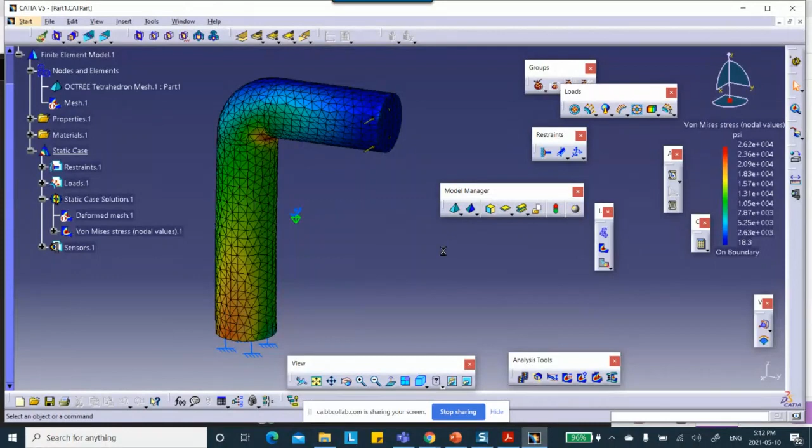Now I'm going to close this, I don't need it. I'm going to go back to the original part, this was the original part, and save it under a different name. So you go to File, Save Management. This is the original, this is what's open, Save As. In that folder, the original one was part 1. It's a bad idea to call this thing part 1. I'm going to call it part 1...

How about with symmetry? How about that? With symmetry. It's very common, people are careless, they overwrite the stuff they have done. And when they go and try to submit it, it's all gone, replaced with the new stuff they've done. In the first place, it's a bad idea to do this within this directory, but if you insist on doing it in this folder, okay, change the name. Don't use part 1, because it's going to overwrite that. Part 1 with symmetry. Okay.

So in that folder, I have two parts: the original part, which was called part 1, and the second part that I just gave that name. It's good practice to change the name up here so you know what you're dealing with. I didn't do that when it gave me the default part name, I just took it. I should have changed it so it wasn't called part one, it should have been called something else.

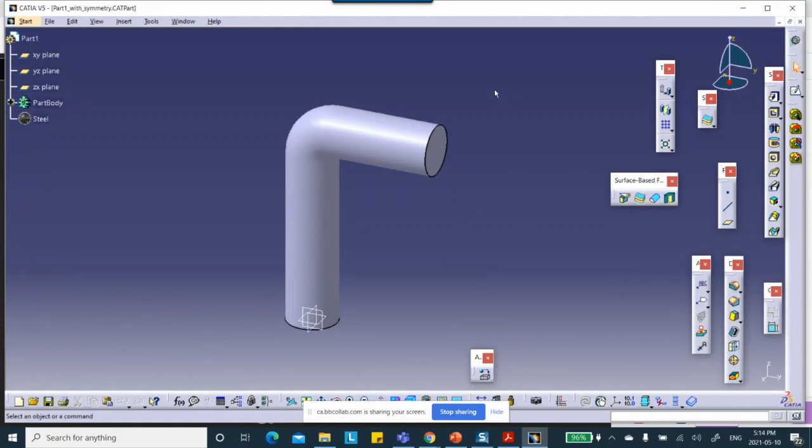If the bottom is fixed, and you apply a load in the direction Y, coming towards you, do you agree the stuff on half of this is the same as the stuff on the other half? If you cut this thing in the middle, do you agree the deformation is going to be the same on both sides? Yes or no?

If the load was applied in the direction I showed you initially, there won't be any symmetry, because this thing bends. But if the load is coming towards you or away from you, perpendicular to that face, then I don't have to model both halves. I only need to do half of it.

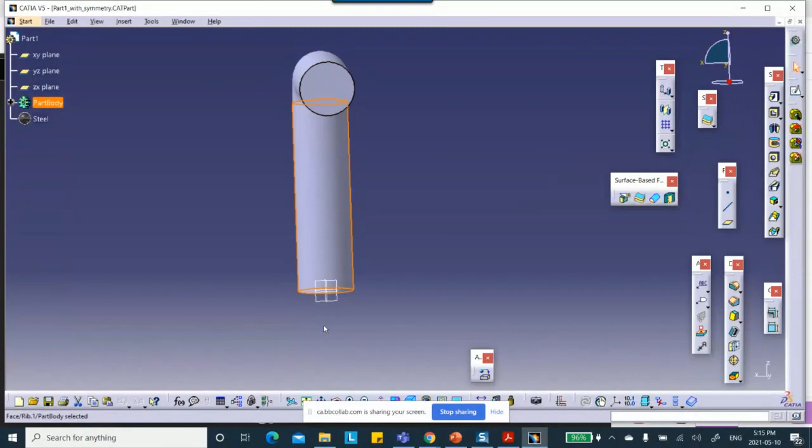So that being the case, I'm going to reduce the model by taking half of this. Let me go to Split, surface-based feature, Split. CATIA calls it split, it doesn't call it cut.

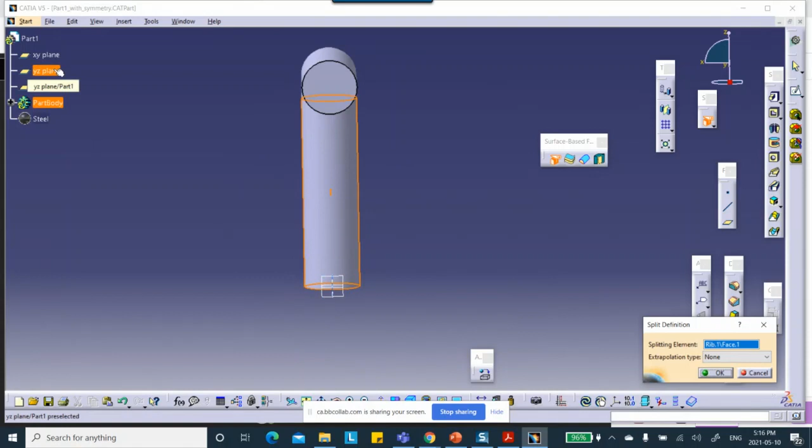I'm going to split it with a plane that puts this thing into two halves. This is very convenient because I already have a plane like that—it's the YZ plane. It asks, do you want to keep the left side or right side? It doesn't matter to me, I'll just keep this.

I'll save it. When I save, of course, it's under the second name because that's how I saved it a minute ago.

Now, symmetry is a big chunk of your mark on the midterm because it makes you think. So don't be surprised if a problem has, hypothetically, 10 points—3 of them, something in that range, would be identifying symmetry. Don't be surprised. Now, as far as making the model, it's done.

Now, for the person who asked me what steps I did, just follow me. Remember, material is already applied there because it came from the other part that I saved under a different name. So you go to Start, then Analysis and Simulation—Generative Structural Analysis, since you haven't customized it.

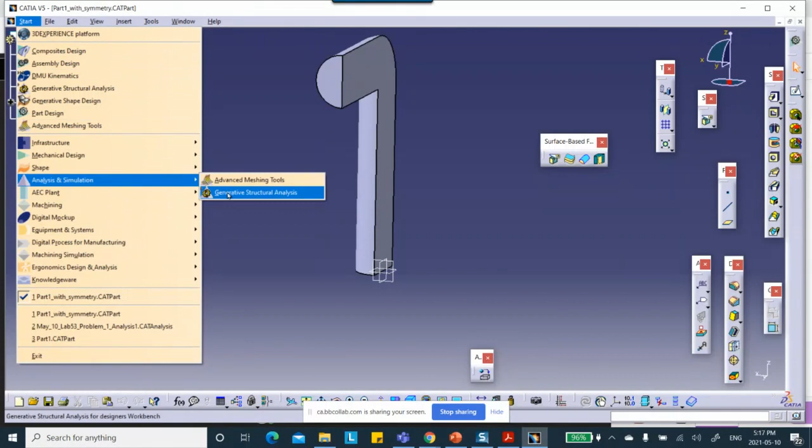Generative Structural Analysis—CATIA sees a solid object and immediately meshes it. There, it meshed half of this. Static problem.

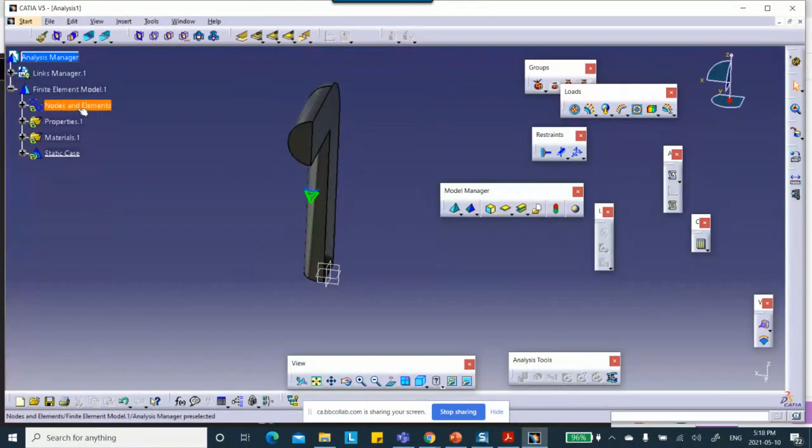If you want to see your mesh, put the cursor on this line, right click, mesh visualization. There we are.

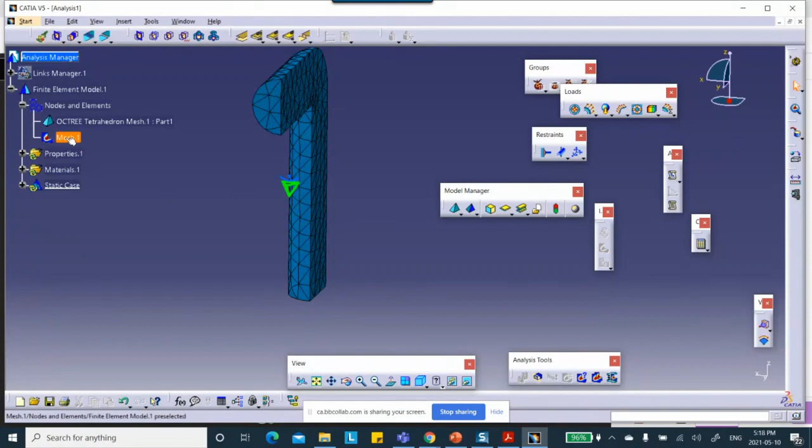To do the rest of the problem, you have to either delete the mesh or deactivate it. It will not allow you to put forces, moments, and restraints on this—this mesh is totally useless. Right click, deactivate. And if you don't like this rendering, change it to some other kind of shading, right there.

You know how to refine the mesh if you're asked to do it in a specific area—I'm not going to do that, I already showed you how. You go to the model manager, the traffic light, second toolbar, local mesh size, pick the thing and do it. I'll keep it like this for now—you're going to do that on the first assignment anyway, and on the test.

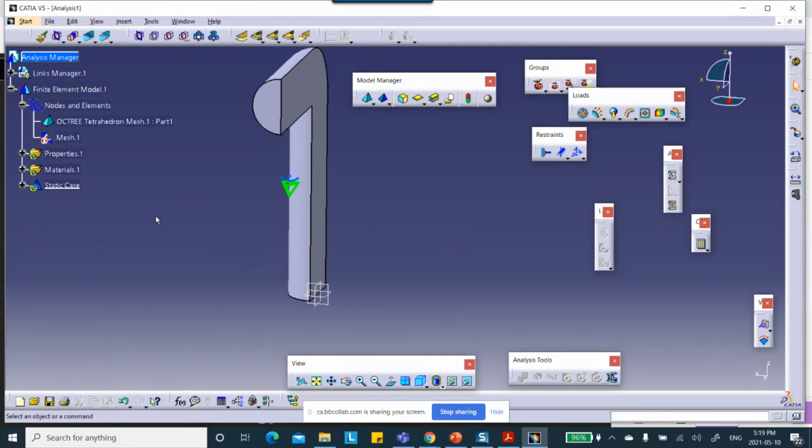Okay, now the bottom is clamped. The bottom is clamped, so there's the clamp. There we are, clamp. There's the clamp.

And I have to apply a force here, coming towards you, at 2,000 pounds.

Can somebody help me? This was the force, right? Distributed force. In the direction—in my case, y, correct? Is that right? Look at your screen. It's coming towards you, direction y. So not x, y, 2,000 pounds.

And the support is right there. This is the support, right? It's asking for the support—where are you applying this force? Well, it's on that face. Say okay.

You know what? If that problem had 10 marks, you'll probably lose 2 marks for this. Can you tell me why?

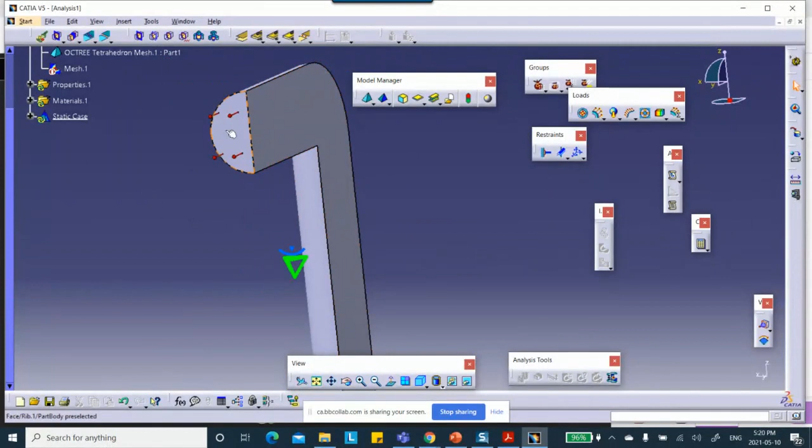Well, if you're pushing it into the screen, yes, you're right. But if you're pushing it away towards you, you're pushing it like this. So in one case you're pushing it this way, in the other case that way. Let's say that this was actually the way I wanted to do that—you'd still lose your 2 marks. What's the issue?

Yes, because that 2,000 pounds is on that entire face, you're taking half of that face. So you divide it by 2. That's very easy to fix.

You go to the screen, or you go to the tree, double click on it, and make this thing 1,000.

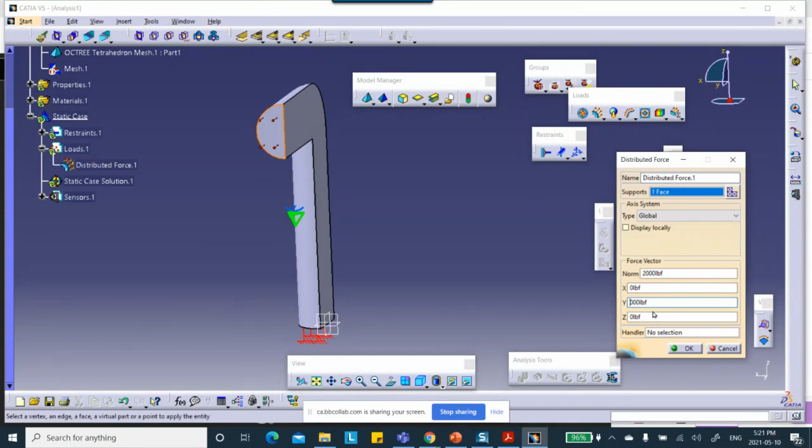Okay, good. Now let me ask you a question. Suppose I said 200 psi, I'm applying 200 psi on that face. What value would I use for the pressure?

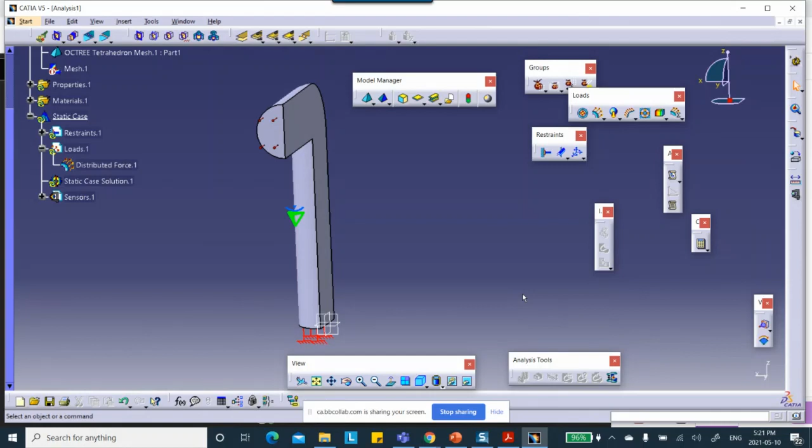Yes, pressure is pressure. Doesn't matter how you look at it, if pressure is on that surface per unit area. So if this was psi, don't divide it by 2. If it's the force, you have to divide it by 2.

Excellent. So before I run it, let me go save this. Save the analysis, because as soon as we jumped in there, we created an analysis file. So you go to File, Save Management. This is the analysis. Save as.

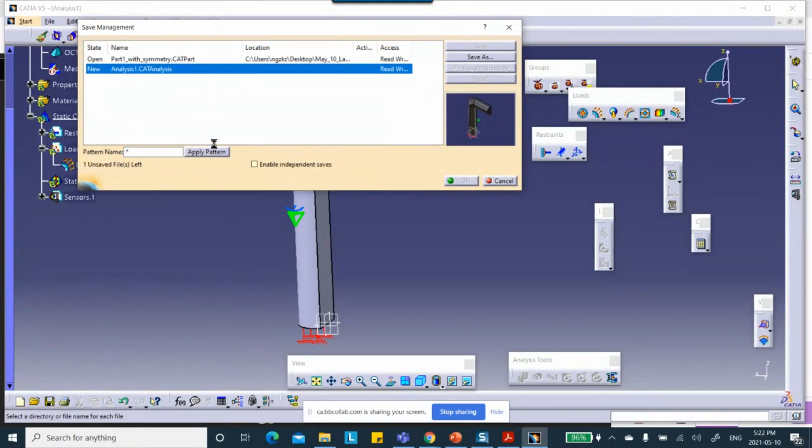I don't want to call it this. I want to call it problem 1 with symmetry. With symmetry. So that it doesn't mess up the one that's already up there. I don't want to destroy this. This was the original problem.

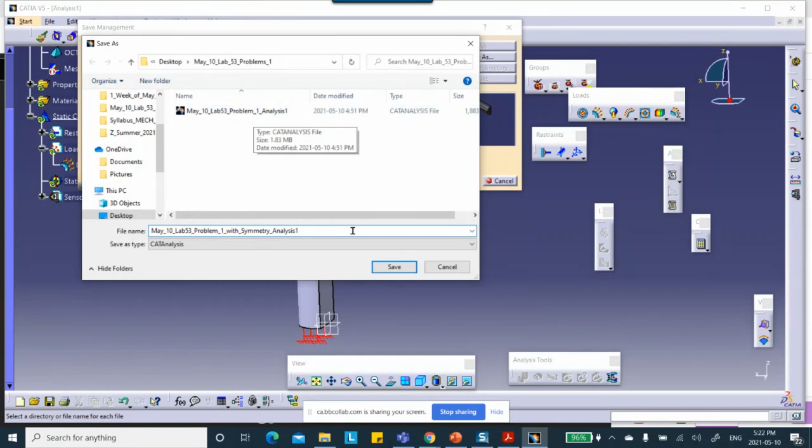Okay. Should I run it? Yes? Can you help me? Is there something else that I have to do? Well, I mean, you can run it. There's no problem. Just run it and see what happens.

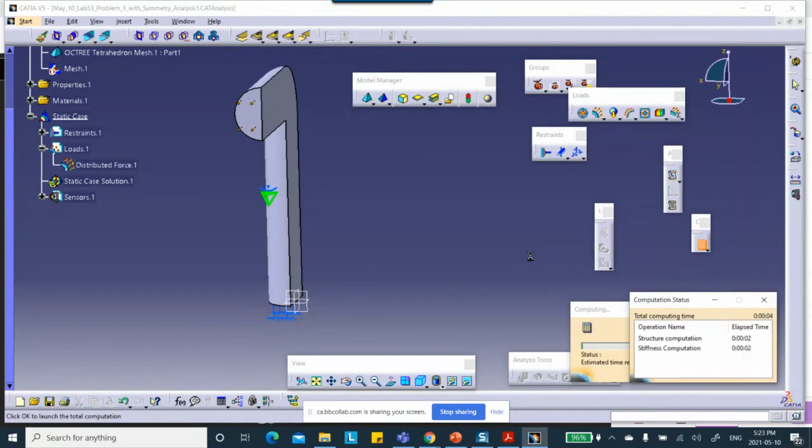And you can look at the deformation. Deformation is this, no numbers. This is deformation, you click on it, it shows deformation. And let's look at it from a view, front view.

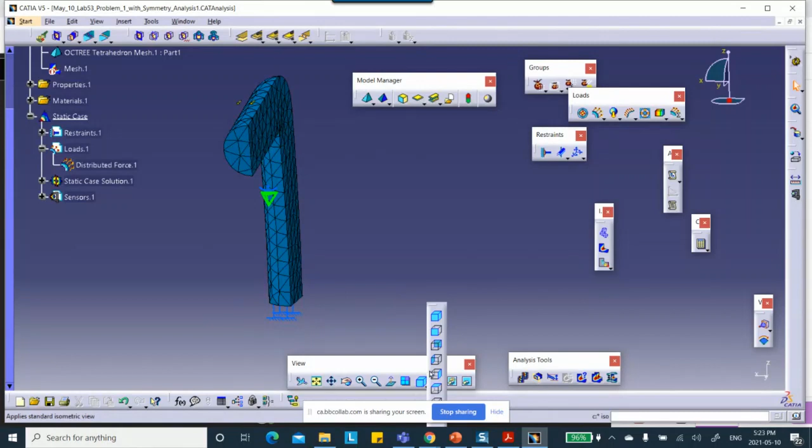Okay, so front view is, I guess, this one. This is side view. Whoops. I guess side view right there. Okay, and I can animate it. Okay, that looks good, that looks good.

Now I want somebody to criticize me, because you don't want to lose your 2 marks on the final exam. Oh not final, midterm, midterm exam. What is wrong with this picture? It looks good, I can plot the stresses, everything looks reasonable, etc. But there's a serious problem.

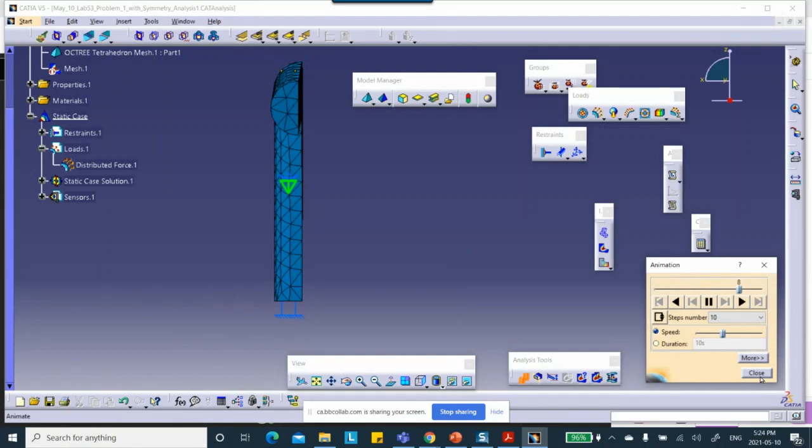What do you say, guys? Gals? Oh no, I did put the force. I put 1,000, right? I did put 1,000 pounds. I did put it, that's why it's actually coming towards you. There is a force there. Here, let me turn it around. You can see that there is a force, right there, right there. You can see that. What else?

Okay. No, we can do that. There's no problem. Here's just, you want to plot the von Mises stress? I'll plot it for you right there. Well, you get stuff, you get stuff. So let me change this thing to material shading.

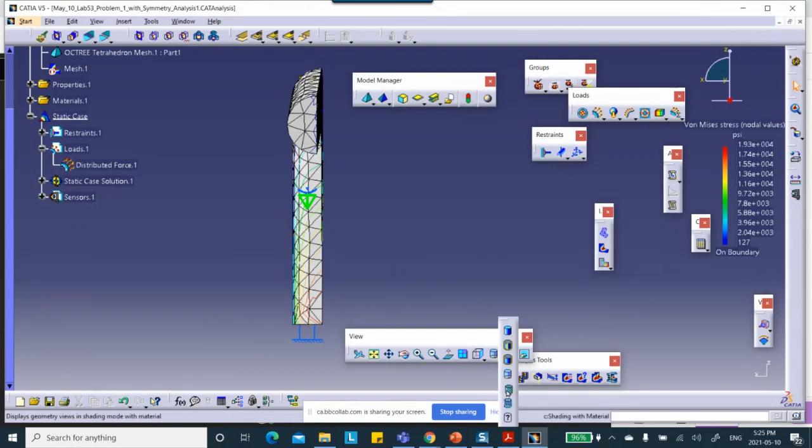Sure, there is. Where's material shading? I'm going to move this thing up there so that material shading. There's a stress, there's a stress. I mean, you can rotate it, put it in this view.

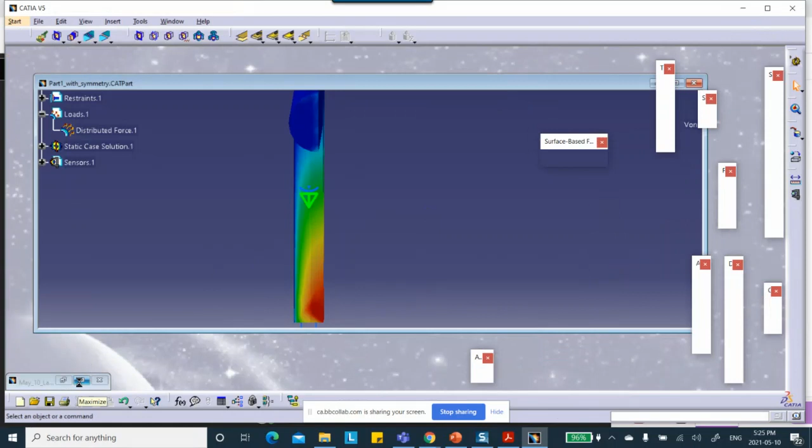Let me ask you this. Whoever told me initially that there is a plane of symmetry here, I said use your common sense. Look at this thing from the front. Let me bring this thing, the same view, but the part. Let me put it in that view. It was the side view, right? Side view. Okay, you looked at that and you told me that the stuff on the left and the stuff on the right are the same, right? They behave the same way. And I agree with you, correct.

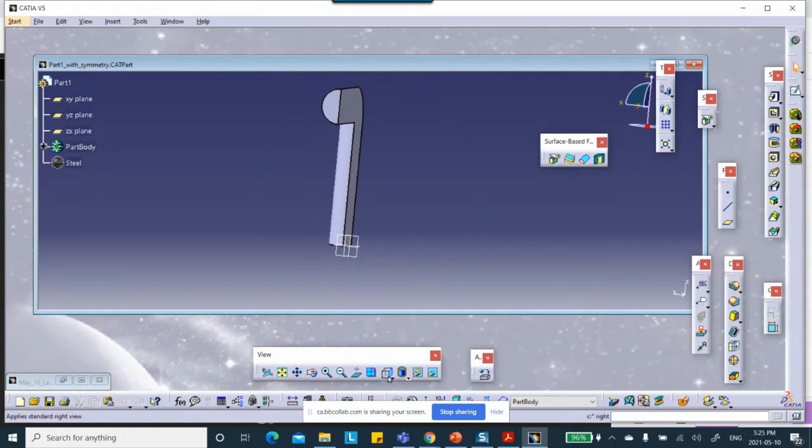So if you are a point on that face, on that surface that I introduced here by cut, see that? I introduced this surface artificially. If I look at a point on that surface, can it go to the left or to the right? Need help? Help me. If I look at a point on that face, can it go in the direction X, either to the left or to the right? It shouldn't. And that's what we call a roller, right? We call it a roller. The points on that face must be, plane of symmetry must be on a roller.

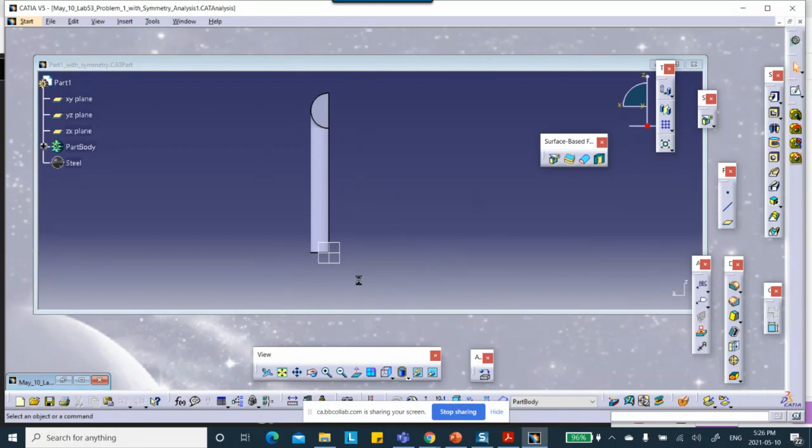When you look at the analysis that I did for you here, if you looked at the deformation, look, it moved. It moved to the left. This top piece moved to the left. Even here they have moved to the left. I can't see it very well because it has moved very little.

So just cutting the piece into two, which is good, it gives you some marks. Just cutting the force into two, that's good, that gives you your mark. Is not good enough to get the full mark, because you have to put that face that you introduced on a roller so that it doesn't move to the left or to the right. That's what the plane of symmetry means.

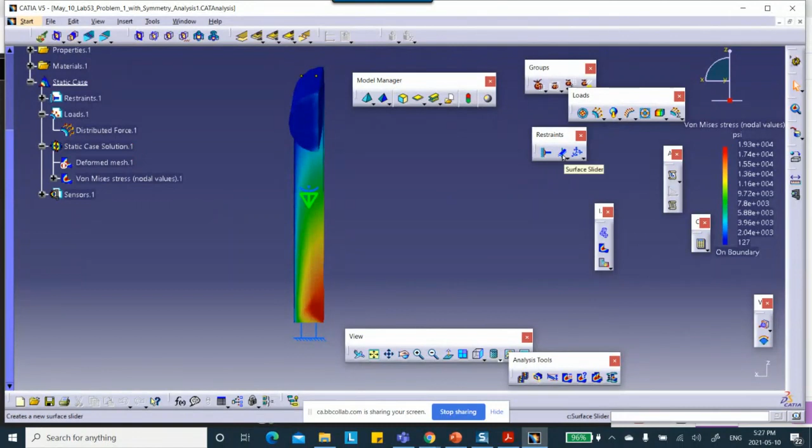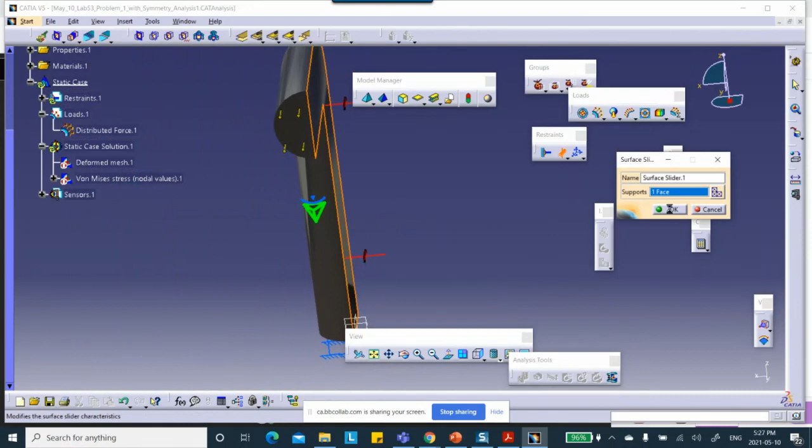So CATIA does not have something called roller, it has something called surface slider. When you look at it, though, it looks like a roller. Okay, so let me deactivate this. When these things are on the screen, you can't apply anything. So you turn this thing a little bit. Surface slider, see that? Surface slider on that face. See that? If you look at it from close, it looks like a roller icon. See that? Looks like roller. Okay, and say okay, and save it.

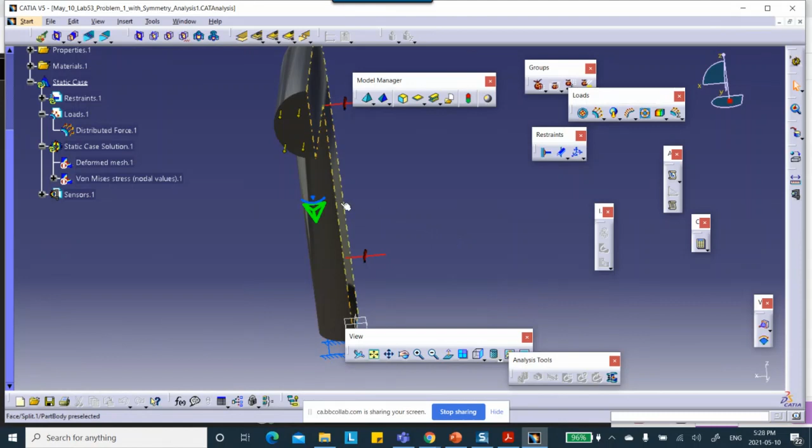The reason it's a good idea to save before running is because if the system crashes, or you set such a fine mesh that it takes forever to run, you won't finish your test on time. Then at least you can kill the job, kill CATIA, and go back to your last saved result. Okay, now let's run it.

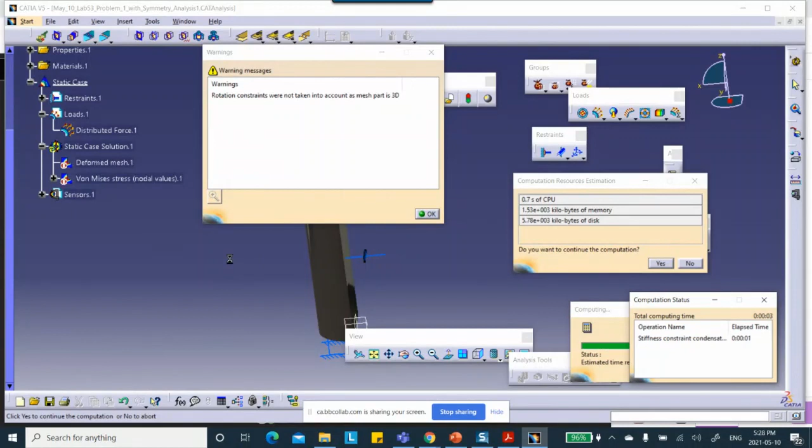While this is running, I have to repeat this lecture three more times. Don't worry about this warning message, you'll get used to it. It's a good idea to read these things and sometimes question them, but not right now—this is the first lecture, basically.

Good, so now let's look at your von Mises stress. View from the side—look, there's no going to the left or to the right. You can animate it, by the way. There's no going to the left or to the right. That gives you full marks.

Otherwise you lose too much because of the surface slider, because it's very common—people see it, they cut it into two pieces, they see the force must be half of that. That's good, but they forget about this, and you can see that it's wrong, basically.

Okay, all right guys, any questions about this?

Okay, now, before I kill this, let me save it so that the last thing I have done is saved.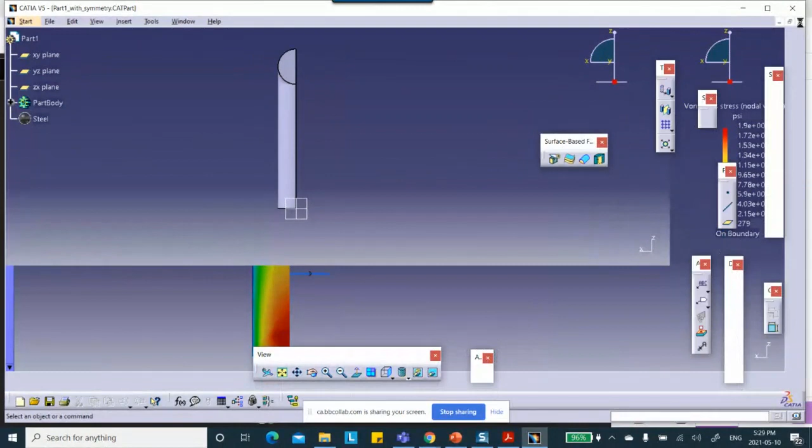Now when it comes to uploading your work, either for the homework or for the test, what two files do you have to send us? You have to send us the part file and the analysis file. I'm going to kill this one too.

Okay, let me see, where is my desktop? This schedule is so screwed up that I have to make this so I won't forget. Here's your lecture—where is this guy? Where is that folder that I made? Right, May 10th—remember, I made two parts, one with symmetry, one without symmetry, and two analyses, one with symmetry and the other without. These are the analysis files, these are the part files.

So you select example part with symmetry and analysis with symmetry, and submit it. Okay, any questions? Sorry, sir.

Just to clarify, we don't need the cat analysis results and analysis computations files? Okay, yeah, I will do that. But the other fellow was asking—can you say that again? The first fellow was asking me, you don't need what? So I think you have two different classes open right now because we can't hear the other class, but do we need the analysis results and analysis computations files?

Okay, hang in there, one second. I want to make sure I understand what you're saying—you have two different classes? What two different classes? Yeah, the people who were in the section from before, we can't hear them talk. They never changed classrooms.

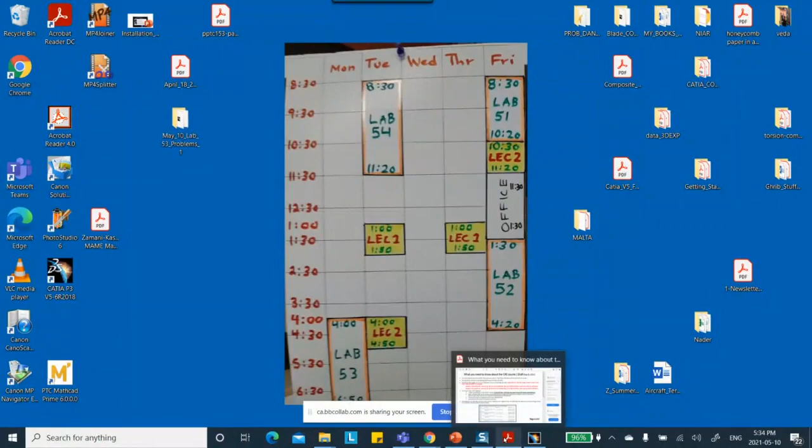Okay, so we have an I-beam like that, and one end of it is clamped, and we let it sag under its own weight. So we want to see what are the stresses, what are the deflections, etc.

First of all, notice that I'm saying I-beam 10 inches long. Imagine you have an I-beam that's 10 inches long, something you use in construction, and you somehow clamp the other edge by welding it to some other piece. How much do you think it's going to deflect? Very little, do you agree? Okay, so this is an academic exercise.

I want to show you how you bring the weight of the object in as the force. There is no force here, there's no applied force, you're not applying any force. The weight comes from gravity. I want to show you how you do that.

Now, first I will do it the way it's done in the book. If you go to my website, those links that you have, you'll see it done both ways, with symmetry and without symmetry. First I'm going to do it without symmetry. I don't want to spend time on making these dimensions, so I will make up something that's like an I-beam type thing, 10 inches long, okay?

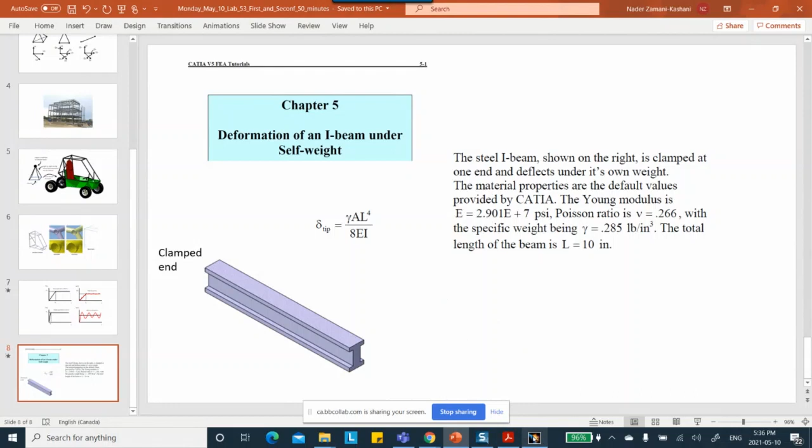Okay, so let me go, CATIA. Start a part file. Remember, I left this name as part 1, so I'll call it part without symmetry. How about that? Part, because it's easier for me to keep track of these things. Part without symmetry—part without Symm, how about that—just like it's done in the book.

Okay, save it right away. File, save management, save as, desktop—where is it—desktop, new folder, May 10, lab 53, underscore problem 2. Okay, so it's going to go in there. Save, okay, save, okay, let's make it.

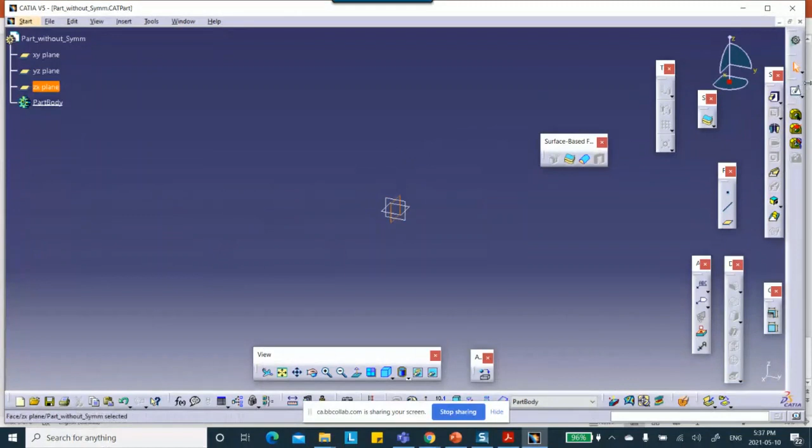On a convenient plane, on that vertical plane, I will sketch something that looks like an I-beam cross section. Be patient with me because I want to use something that is used very frequently. So I'm going to draw something that is ridiculous, doesn't look like what I want, and I'm going to show you how to fix it.

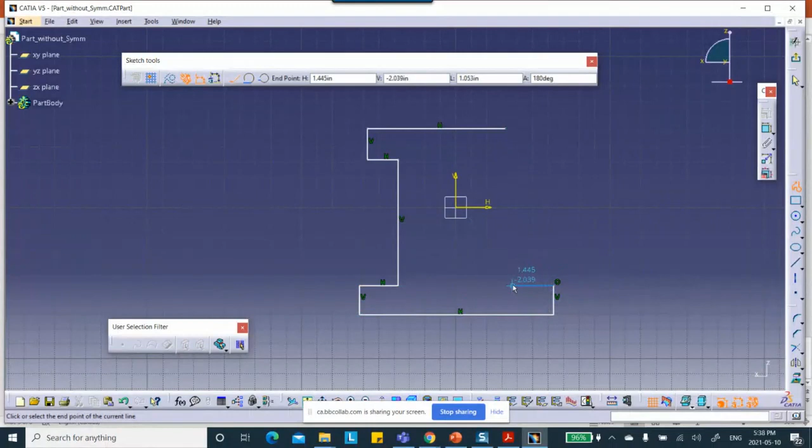Okay, this is my I-beam cross section. Let's do a cleanup here.

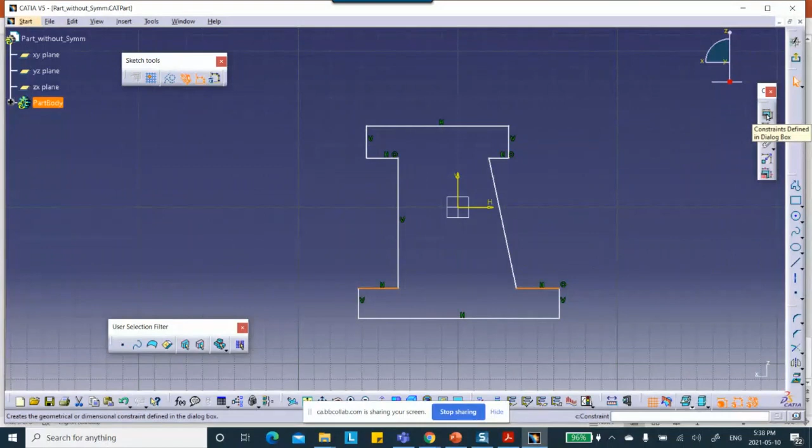First, I want this line and that line to be aligned. Control that line, go to constrain using the dialog box, and say coincident. This line, control that line, I think they are on the same plane.

But let's make it coincident anyway. Okay, good. This line, control that line, we want to make them parallel. Parallel. Okay, very good.

This line and that line and the middle axis, I want to make them symmetric. This line and that line and middle axis to be symmetric. This line and that line and the middle axis to be symmetric. Top line, bottom line, middle axis to be symmetric.

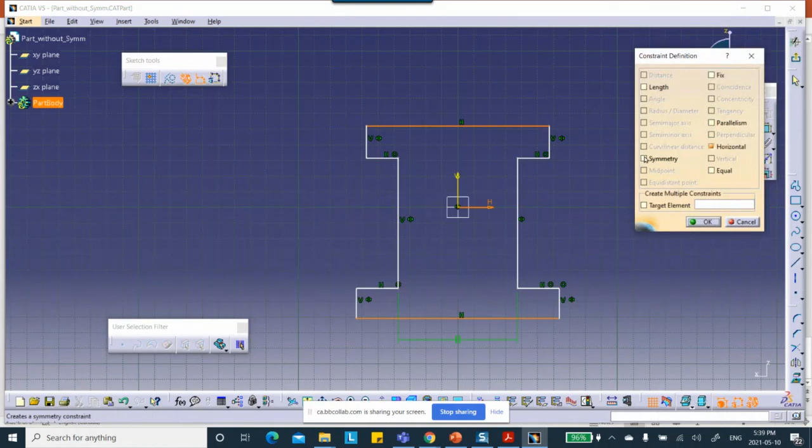Let's do this one. This line, control that line, control middle axis to be symmetric. Oh, God, let me see. Okay, I think these are already symmetric. These are, no, maybe not.

Let's proceed. That line, control this line, to be coincident. And this line and that line to be coincident. Okay, now these are not symmetric, but let's see now.

I don't know why it was bombing out on me. Maybe these dimensions, let's take these dimensions out. Yeah, let's take these dimensions out. I didn't mean to put dimensions there.

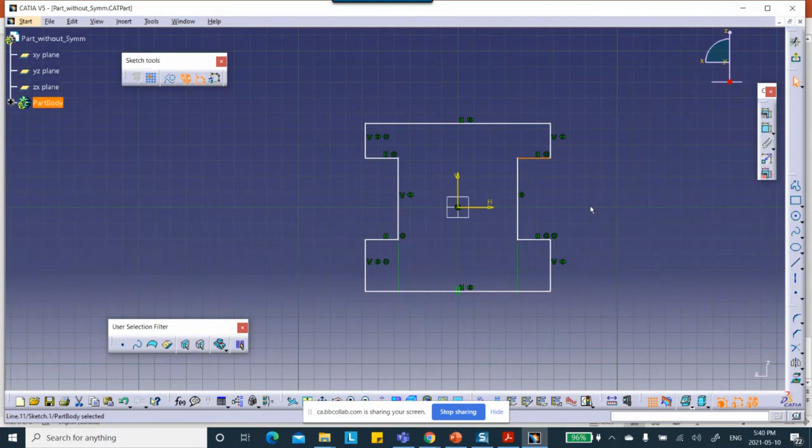This line, control that line, middle axis to be symmetric. This one should work, yeah. And finally, that line, control this line, control middle axis to be symmetric.

Now you drag this thing any way you want, and it's going to stay the way you want it. Look, I don't care how you do it. I want to show you this is a very valuable tool. That's all, that's what I want to show you.

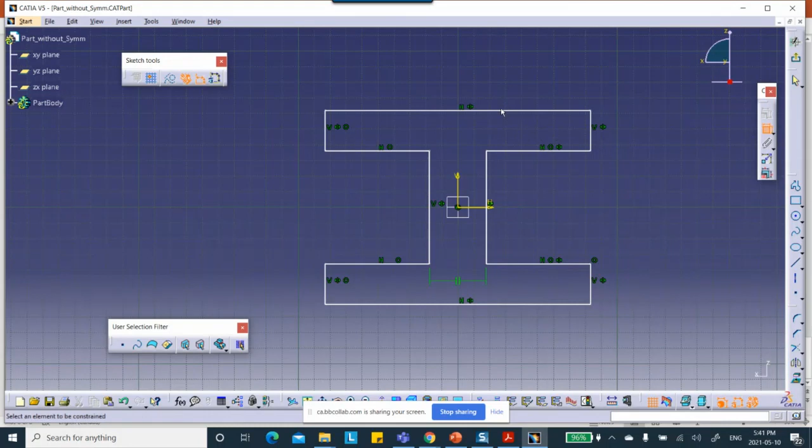Just so you have a rough idea, let's put the dimension on one of these at least to find out how big these things are. So this thing is 6 inches, an I-beam 6 inches. Probably that's okay, yeah, 6 inches, that's okay.

Is there any question? Make this I-beam the way you want it, matching the dimensions you would give it. That's all, okay, exit. The only thing is that 6 inches, isn't that too big? Maybe, because I'm padding this thing by 10 inches, maybe I should change this to, I don't know, maybe 3 inches.

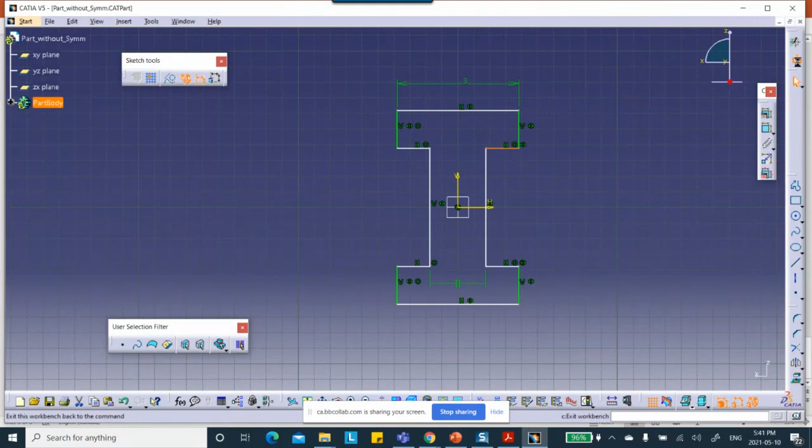Yeah, okay, that's fine. Let me also move. Okay, good, because I'm padding it by 10 inches. So, pad it. 10 inches. Good.

All right, so apply material to it, made out of steel, metal, steel, on that face, on that part. There we are. Save it.

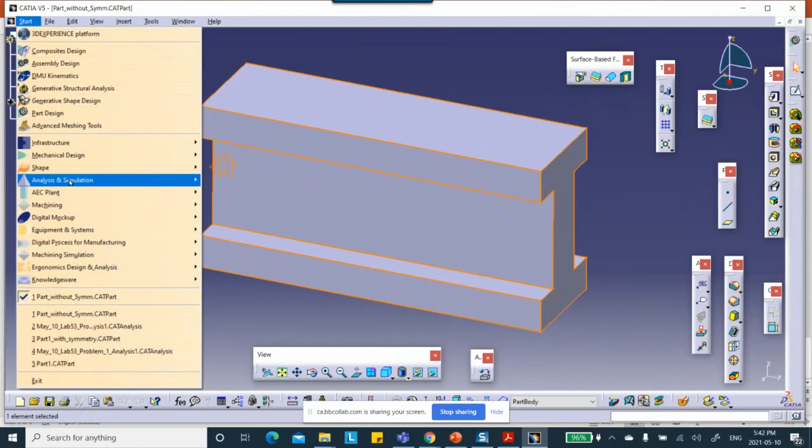Now we're going to go to generative structural analysis. Analysis and simulation, generative structural analysis. CATIA immediately meshes that for you.

So if you change the rendering you can see it better, right there. You want to see your mesh? Put the cursor there, right click, mesh visualization.

Okay, now this is not too bad, but generally speaking, I-beams, the flange is a lot thinner than what you see here. And the web is a lot thinner than what you see. You don't see I-beams like this, okay? Or at least used in structures.

Now look, if this was thin as opposed to what it is now, you would have only one element through the thickness. The moral of the story is that because of the dimensions here, think about it as a pop can. A pop can has a thickness, but the thickness is a lot smaller than the other side's dimensions of the part.

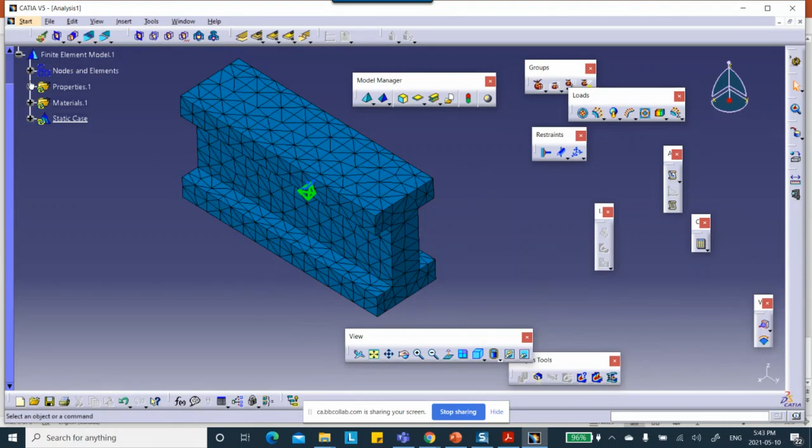So you do not model those things with solid elements. But this is the only thing we know how to do right now. So right click, activate, deactivate.

Shall I save it? File, save management. This is the analysis, save as. In that folder, let's give it a name.

May 10, Lab 53, no symmetry. How about that? No symmetry, so that I can identify what these things are. You say okay.

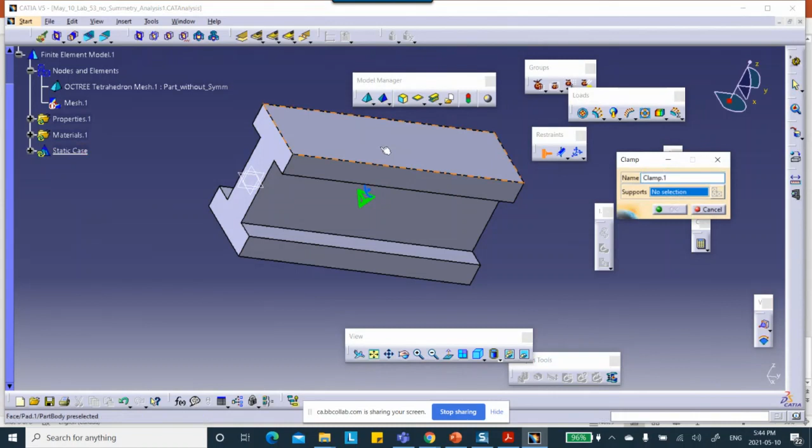All right, the end is clamped. This end is clamped, clamp that end. So what it does, it puts it on the entire thing, but for demonstration purposes it probably puts it on the centroid. Now I want to apply my load, right? Load.

Okay, what do you suggest? How much force should I put up there, and where should I put it? Am I applying a force here, for example, of some magnitude, or what do you say? What is the force that's acting on this part? Or how would you calculate it?

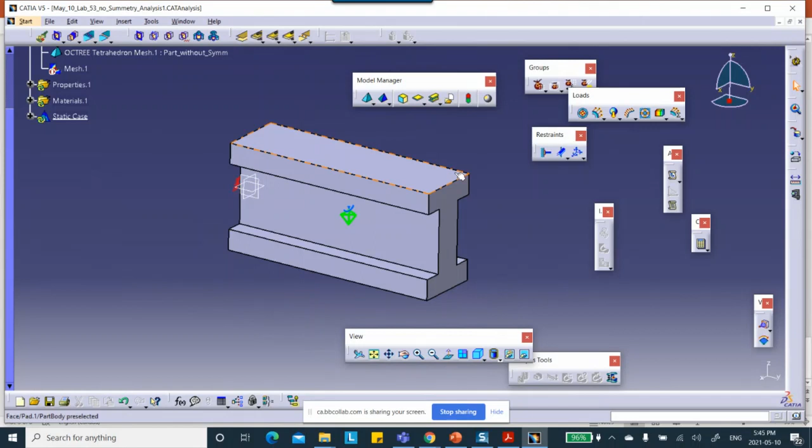Yes, you're absolutely right. I have no clue where the geometric center is, and it can be found, but there's a way to just say, okay, give this object an acceleration. See that under the load? There's a globe here with a downward arrow that reminds you of Apple Newton. You click on it and it asks what you want to specify gravity acting on.

It doesn't matter what you pick, it picks the whole thing. That's why you don't have to go find the weight. It'll do it for you.

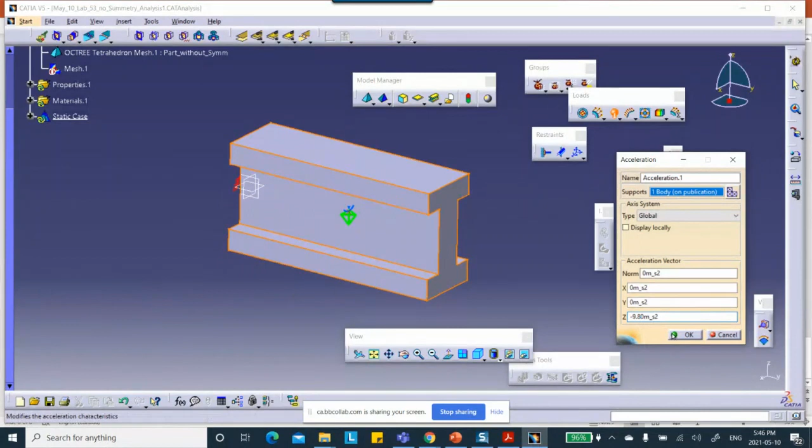It asks, in what direction is gravity acting? It's acting in the negative Z direction. If you don't know what it is, you know it well: minus 9.81. Is that good enough? Remember from physics, 9.8? Yeah, there we are.

It does it for you. You don't have to find the geometric center, you don't have to find the weight. In fact, if you did it manually like that, you'd get different results. This is different.

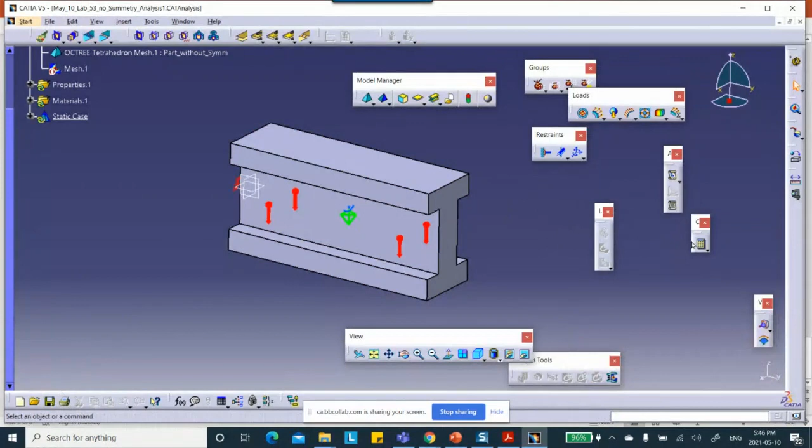Okay, so save everything and run it. Compute. Horrible mesh.

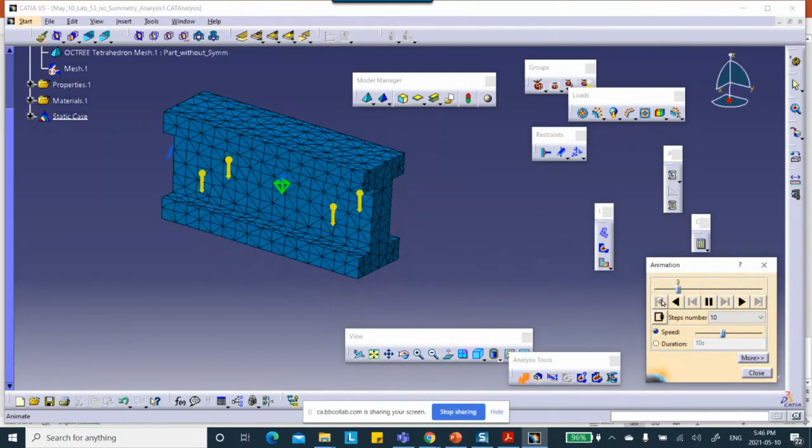Look at the deflection. Oh yeah, that looks good, at least it doesn't twist. These things are good for supervisors who want to look at things and see whether something's wrong. As an engineer, you want a first impression - if this was going to the right, you'd suppose there's something wrong here. Okay, good. Now if you look at the stresses, it's going to be extremely small.

Imagine this is an I-beam, about 1 inch. How much weight does it have? 21 psi - that is nothing. So look at the material shading.

Biggest stress at the wall. Okay, I took my strength of materials, I know what deformable bodies are, I know the biggest stress is at the support. 21 psi, that's nothing. You know what atmospheric pressure is?

Atmospheric pressure - you remember that, right? Don't you watch the news? Yep, good, good, somebody's going to answer. Yeah, 14 psi. So basically we have air.

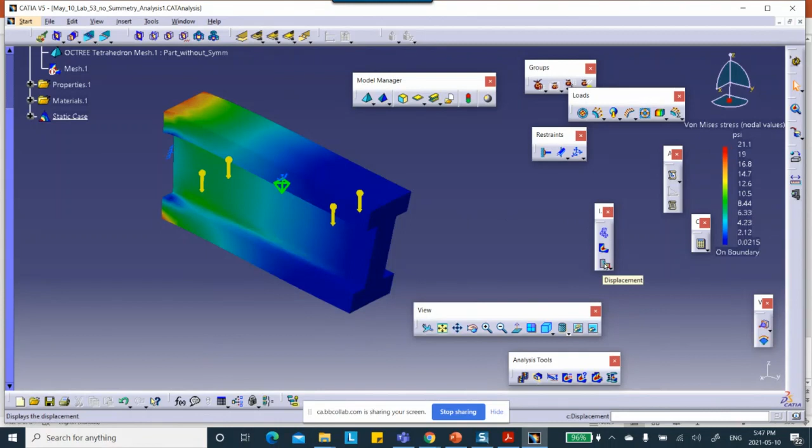So you're right, if you look at the deflection it's nothing. Deflection magnitude, something like 10 to the minus 6 inches. So we know how to do it, it just doesn't make sense.

Because why would you want to know the stress in an I-beam 10 inches long, 1 inch thick? Nothing. Now, why is this thing useful?

If this was your car antenna, you know the telescopic antennas that come out, and you accelerate - it's like gravity, but not really gravity acceleration. Gravity is acceleration, so if you want to solve a problem like that, or if this object was sitting in your car going at 10G - you'd become unconscious, of course, at 10G - it'll bend, but of course it's not gravity. That's what you use this thing for, if needed.

Now, the other thing is, what if I want to use symmetry? Let's do that, let's do it. So let me save everything. It's going to take only 3 minutes at most. Kill that.

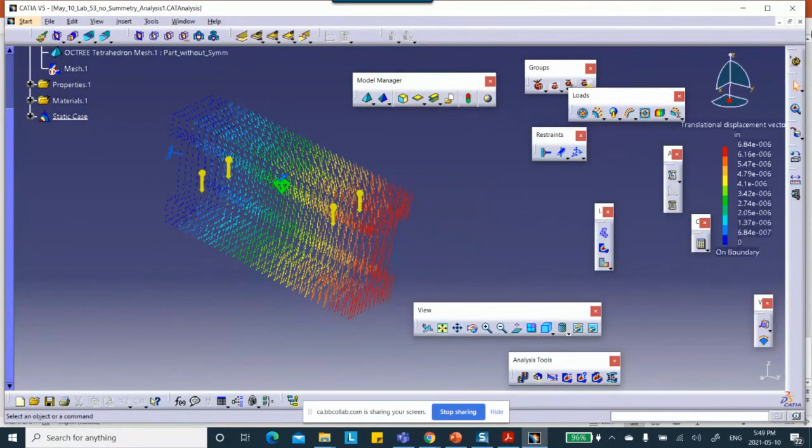This guy, I want to save under a different part name with symmetry, okay? So file, save management, in the same folder. I don't want to call it 'without symmetry' - I want to call it 'with symmetry' so it doesn't screw up the other part. Okay.

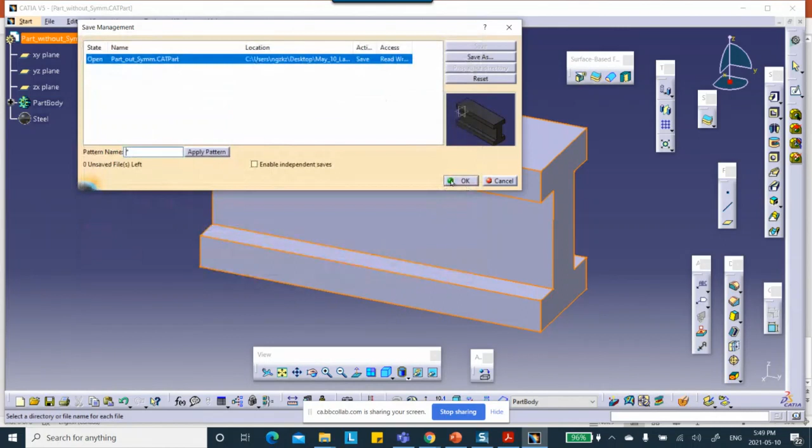Now I take half of this, right? Remember the view, don't take a quarter of it. Because if you were pulling or pushing into it, yes, a quarter would be a plane of symmetry, but this is bending. So there's only one plane of symmetry, which is vertical. So cut it with this plane.

And because I made it symmetric in the first place, it looks okay. If this wasn't made the way I made it, you'd have to go create a plane exactly in the middle and then cut it with that. We're almost done - save this.

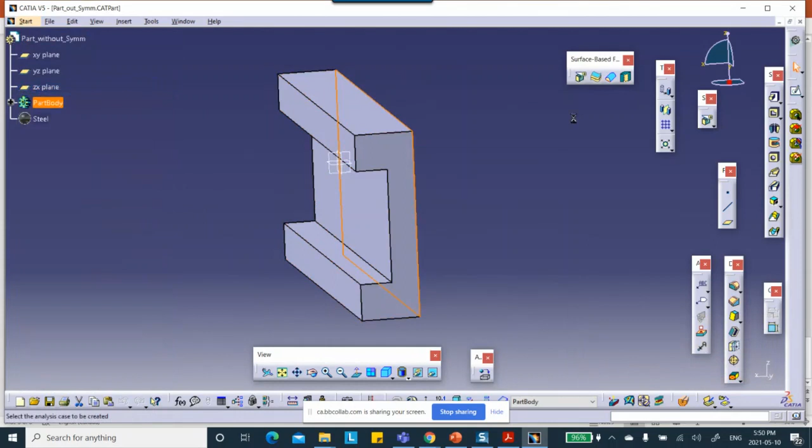Go to the analysis, generative structural analysis, static, save it, file, save management. We already had something there - we're going to give it a different name, we're going to call it with symmetry.

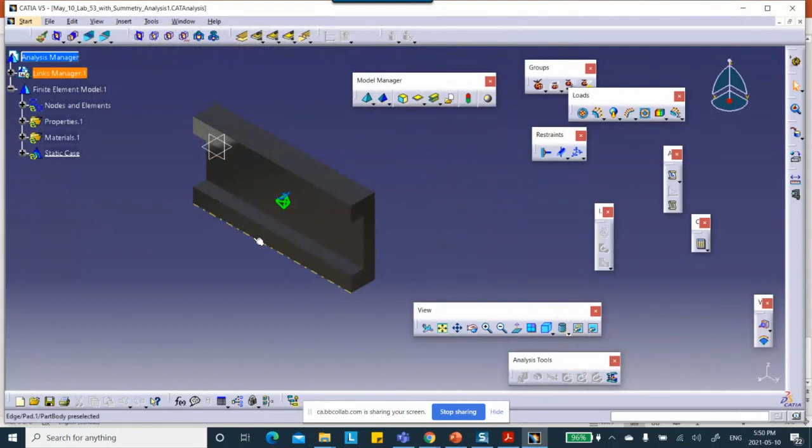Say okay - left end is clamped. Apply gravity load on it. Anything I did before is still valid unless you erase it. On that object, it doesn't matter what you pick, even if you pick the corner, because these are body forces - it's entirely on the entire object.

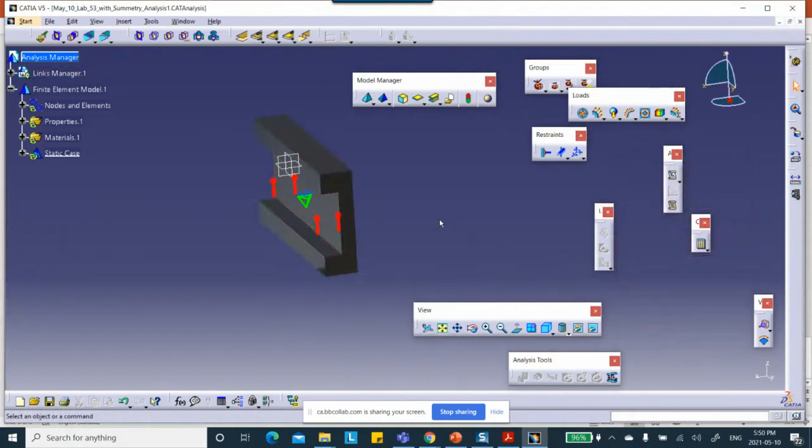Help me with the last 2 marks of a 10-point scheme on the test that you wrote - what's the last thing? Out of 10, you're going to lose 2 for sure, something like that, for this problem if you run it like this. Help? Yes - surface slider on that face.

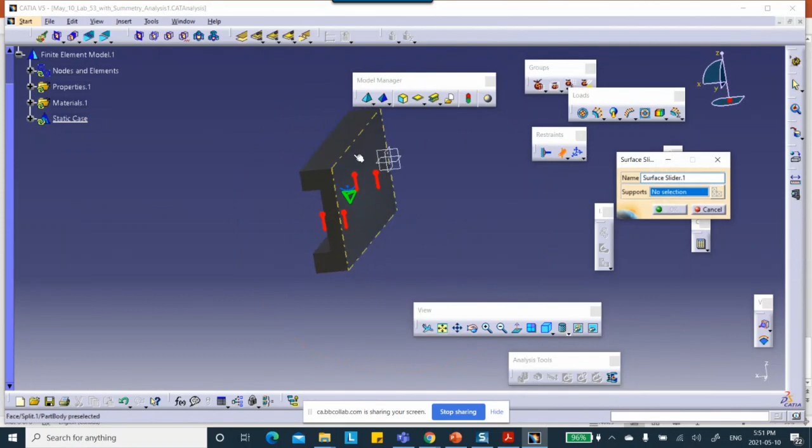Okay, save it and run it.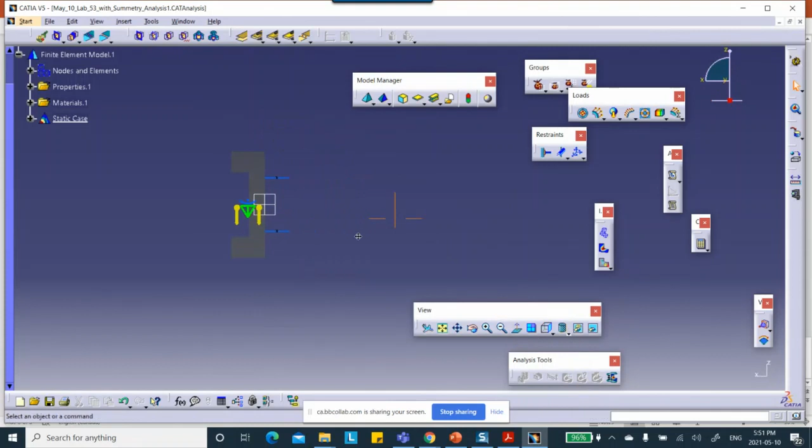This is going to go up and down, it's not going to go to the side. Here's the stress. You can animate it.

Now, last thing I want to show you is there's an icon here, the amplification factor. You click on it. It took that amplification factor because the deflection was so small that it had to magnify everything by a gigantic factor. It'll do it for you.

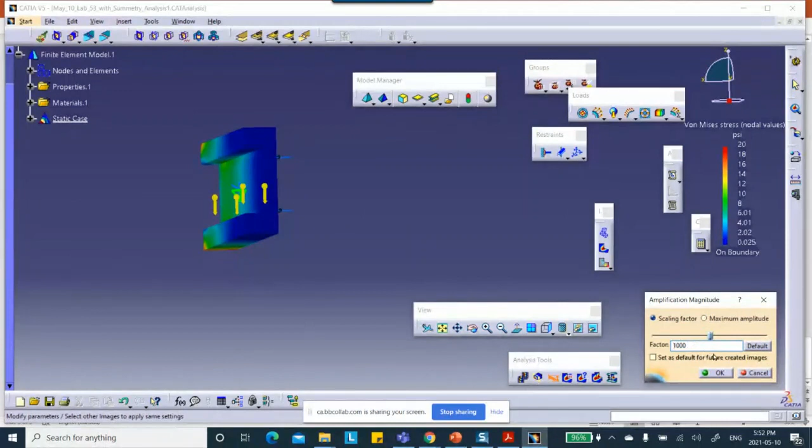You can change that. Would you like to make it 1,000? It's a big number. Change it? I can't remember. Well, let's make it default, let's make it 1. Wait a minute, what happened here? Hang in there, something is screwed up here.

This is my, okay, very good. So, amplification. This is the default, okay. Let me magnify it more.

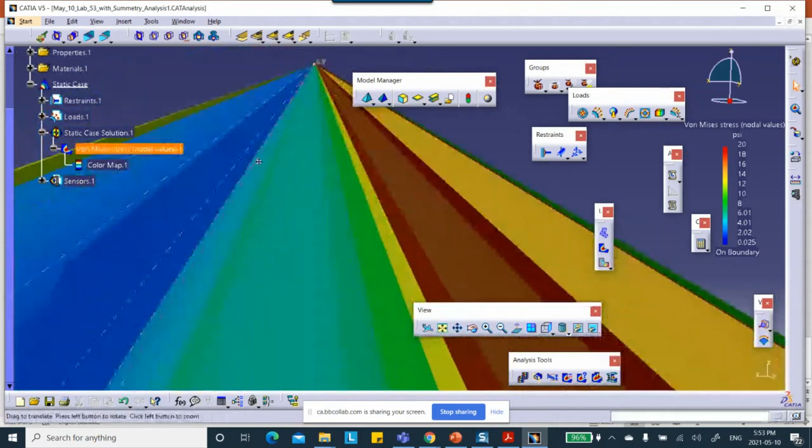10. I know what happened. Let me magnify it more. You see, this internally changes it so you can see it on the screen. If you go default and fit, there you are. This is under your control.

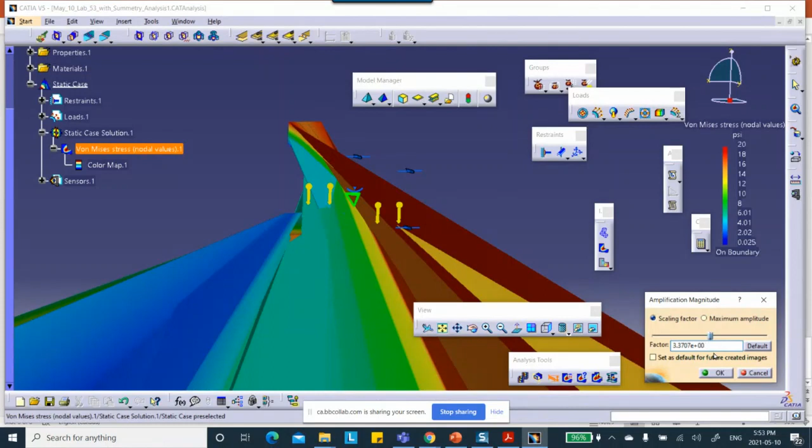For example, you can make it 8 times, 10 to the 8. There. Okay, so let's make it 6. There. Okay, don't let this thing distract you.

You have control over this. CATIA will choose an optimum so it fits on the screen. But this is under your control. Make this thing 6, and that's what you're going to see.